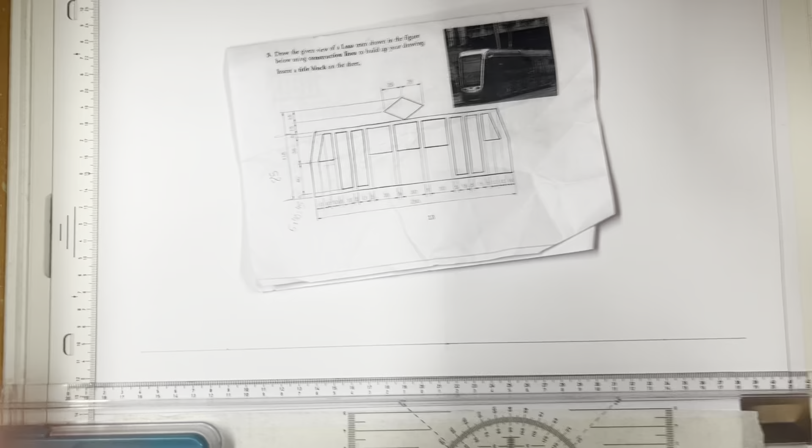Okay, so we're just going to do a quick video here going through the tram or Luas question.

Okay, I've drawn my title block border, so if I pull that back out, you can see my border goes all around. Title block is down the bottom there, with my T-square, you can see it. So, with my centre line drawn in, same as I've done for every other question.

Now I'm going to look at my drawing. It gives me an overall width of 250, an overall height of 115. So first thing I do, go 12.5 or 125 because it's half of 250. So mark to there, and then 0 in the center out to 125. That's our 2 marks there. So that's from that point there to this point here is 250 mil.

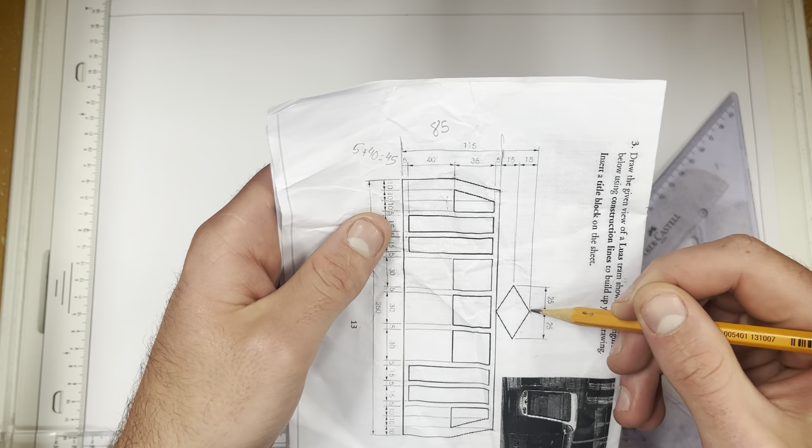Then it tells me that the overall height is 115. So from the bottom here to the top of here is 115. We don't want all of that for this section here. So we add it up, we go 5 plus 40 plus 35 and 5. 35 and 5 is 40, 40 and 40 is 80, plus 5 is 85. So from the bottom of the train car to the top of the train car is 85.

So I'm going to put the 2 of them in now. So I just send the line up. I'm going to mark 85 on it, and I'm going to mark 115. So make sure when you're marking 115, it's not 150, it's 115. So 10 is 100, 11 is 110, and then 5. And we're just going to draw 2 of them over really lightly.

Okay, and then come to your other point and extend it up, straight up. Okay, so then I need to mark in a few other little bits.

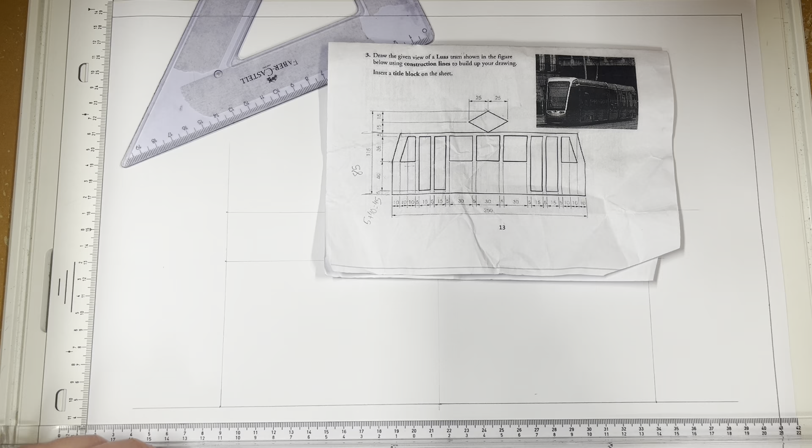So I need to figure out how I'm going to find this inclined line, or this line that's going at a bit of a slant. So it tells me that if I come in 10 mil and draw a line straight up, it brings me to that corner point there. So the first thing I do is mark in 10 mil.

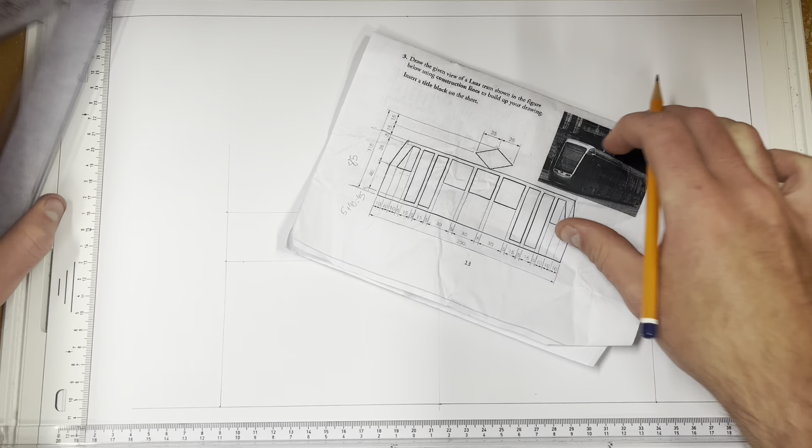Then it also tells me that if I come up 45, so if I bring this close here, so 5 plus 40, so 45 is this length here, where it goes to before it starts to slant in or turn into a bit of a slanted line. And then you can also see that lines up with the bottom of our windows here as well, and it goes the whole way across. So I'm measuring up 45 mil and drawing that line straight across, because it'll be the same on both sides and it'll be the same for windows going the whole way across.

Then all I need to do is join 2 lines like so.

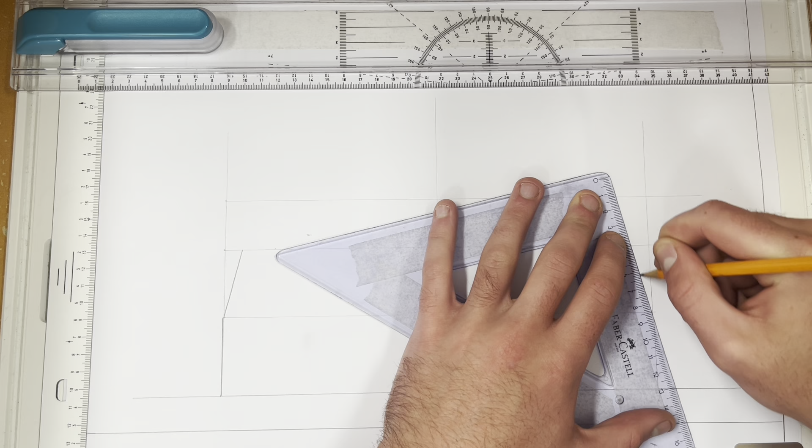So same thing on the far side. So measure in 10, put the mark, and connect the 2 of them down. Set square in, draw my line straight up. And then I can come in and heavy this top line in, and I'll do the bottom one as well.

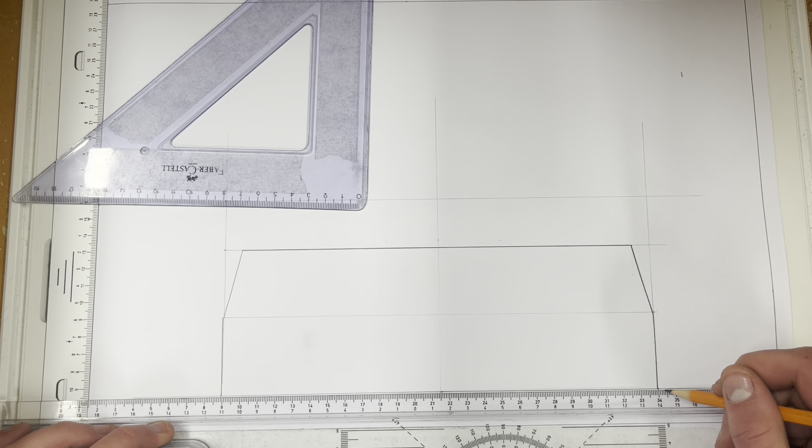So there's the outline of what we're looking for. Now we need to start filling in the windows. Okay, so I've the outline drawn in. Now I need to start adding in all my windows.

So you can see here, I need to come down 5 mil for the top of my windows and up 5 mil for the bottom of my doors. If I draw straight across from here, nice and light, and same from here. Same again, nice and light. And we know that the bottom of our windows hit that 45 mil line that we drew earlier.

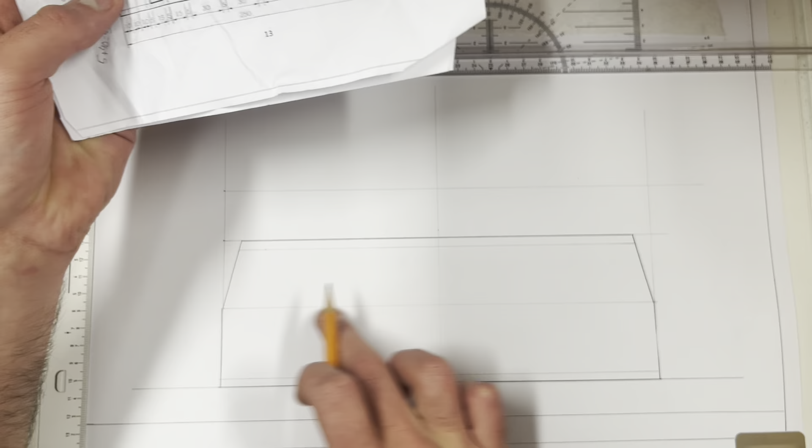And now all I need to do is actually draw in the widths of my windows. So in the drawing, it tells me to come across 10 mil, and then the window is 20 mil wide. So come across 10 mil.

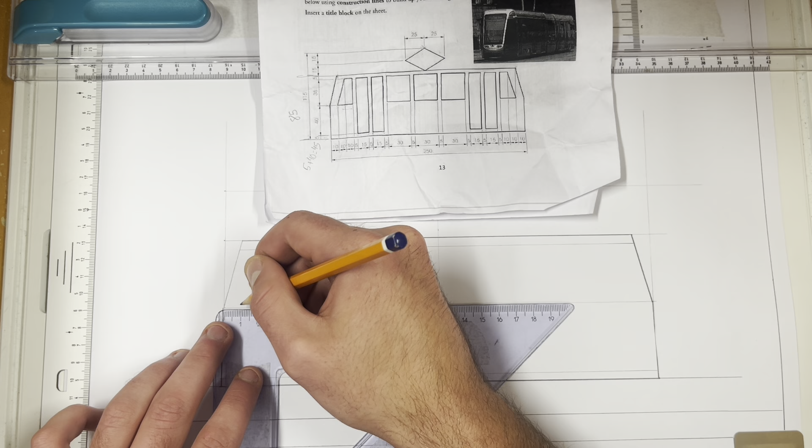So, 10, there's our 20, and there's our 30, because we're coming across 10 mil, so that's that line there. So that's going to be the bottom left corner of our window.

Then we have this second 20, which will go to the top, which will give us this little slope here before it comes down. And then there's the other part of our window. So draw my line straight up.

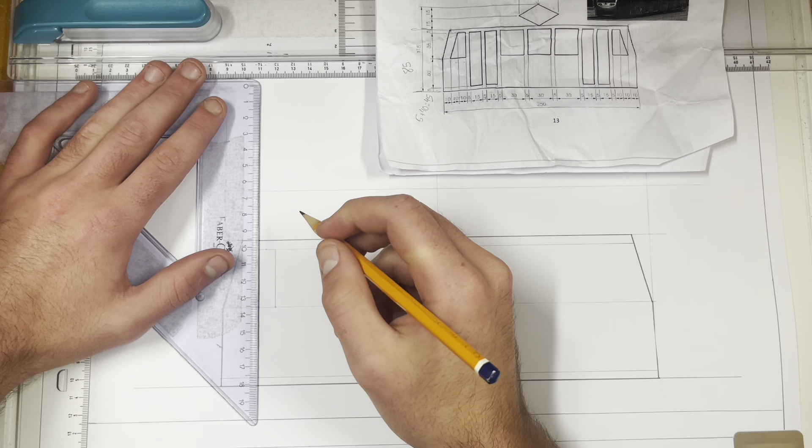Okay, I'm going to bring this up to here, so I'm just going to change that to a point up there. Join the two of them together. That joins the whole way back, and then I just connect it all up.

So now that I have that first window in, I'm just going to go through how we do the spacing for every window and door the whole way across, just to make sure that it all fits in on our page.

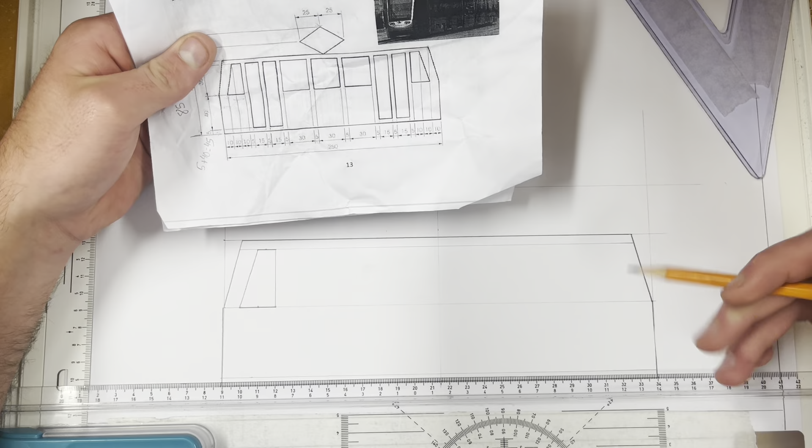So there's a 5mm gap between them, so 5mm, and then the door is 15mm. So we're doing a 5mm gap. I'll draw that in. Now remember, they're going from top to bottom there, so they're going from that top 5mm line to the bottom 5mm line. Then our door is 15mm.

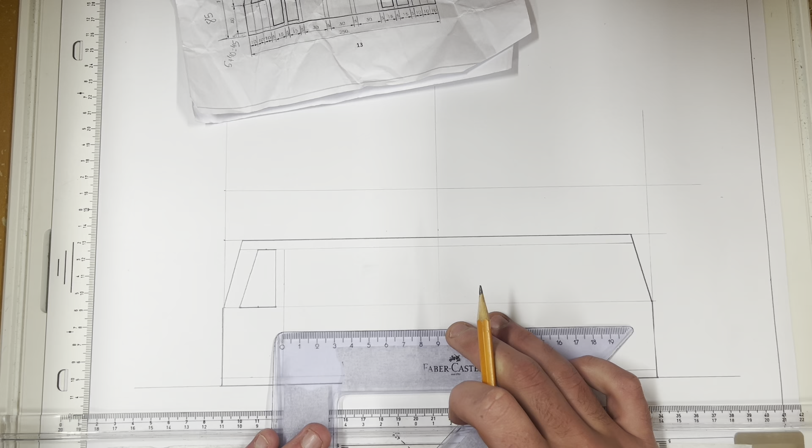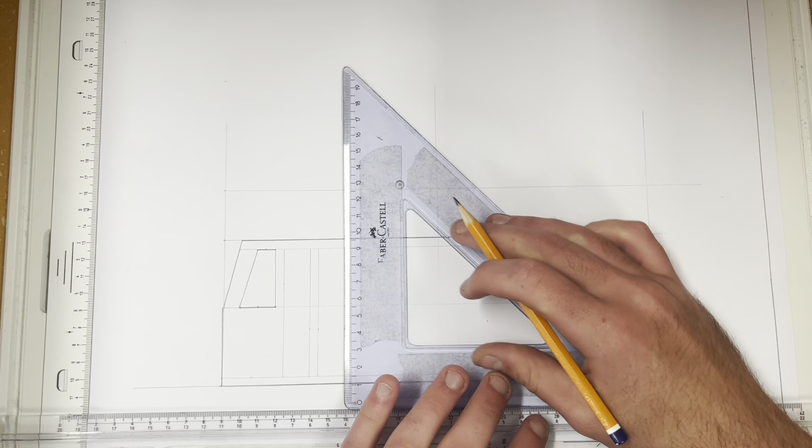There's that, and then there's a 5mm gap between that one. And then I'll just mark in our second door here as well while I'm here. So connect from there to there, connect this one to this one, and then here to here. So there's our two doors, 15mm wide, 5mm gap in between them.

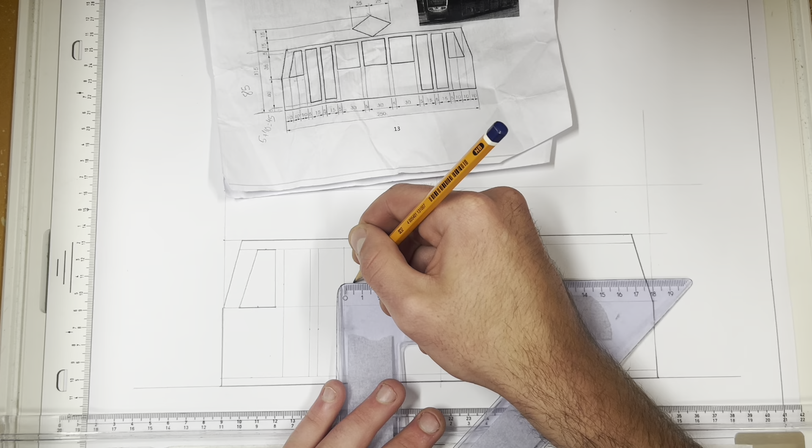Then we go to our next window, so there's a 5mm gap before it. And don't forget that these windows are only going to be in the top half, so make sure you just put your point up at the top half. So there's our 5mm. Draw in that first section of my window. There's that. Then the window is 30mm wide, so I come across 30mm, and I draw that down.

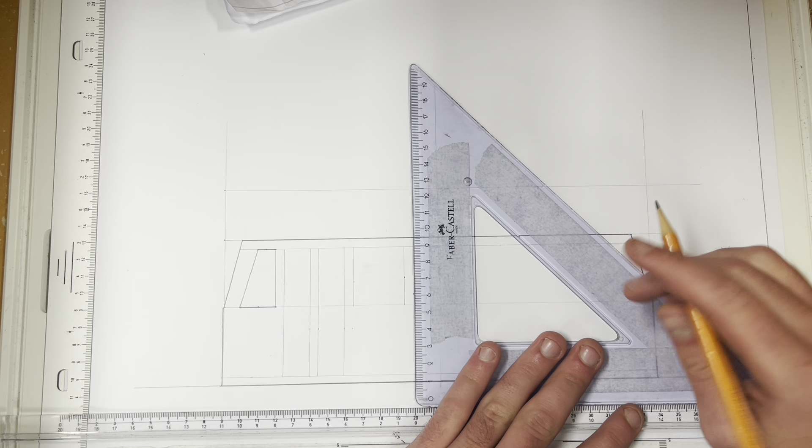Then I'll be coming across 5mm again, so there's our 5. Draw my line, and 30mm again, and you can see here that 15mm should line straight up with your center line because it's the center of our drawing. So there's 30, so if you look there, from 0 to there was 15mm, which lined up with our center line, and then 30. Draw that in.

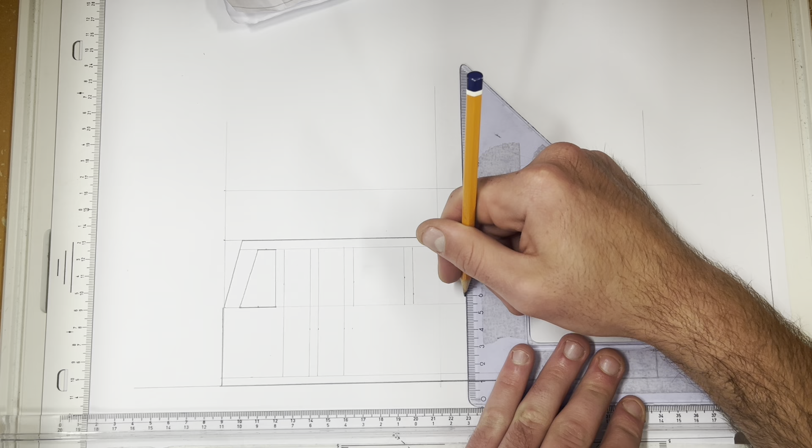And one last window, 5mm and 30. There, and there. Okay, so there's our two doors, 3 windows coming across.

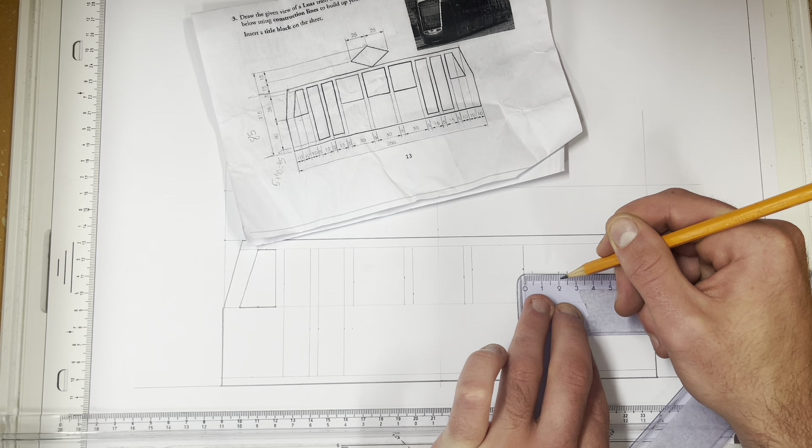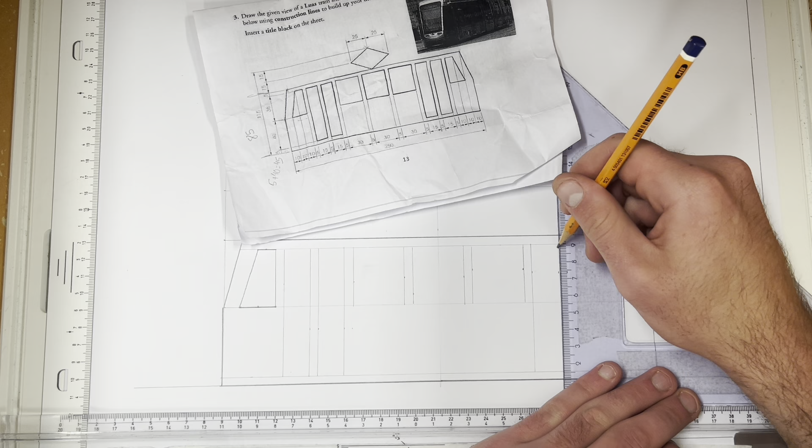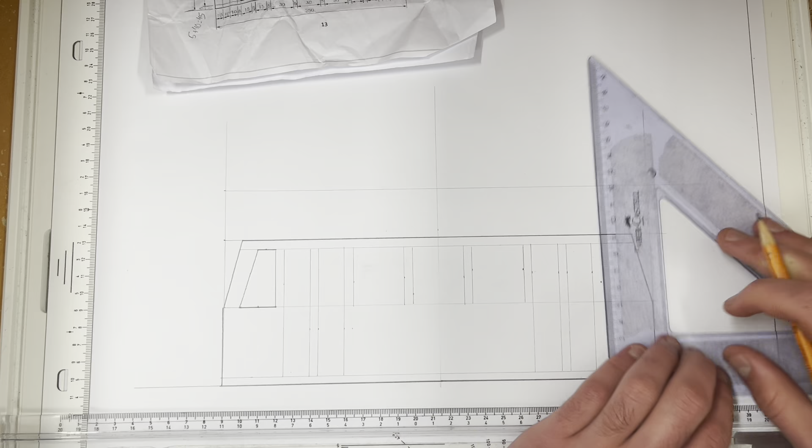Now all I need to do is finish in this last window, so over 5mm, and then our window was a 10 and a 20. So draw the first half of it here, or first little bit I should say. There's our first line of the window.

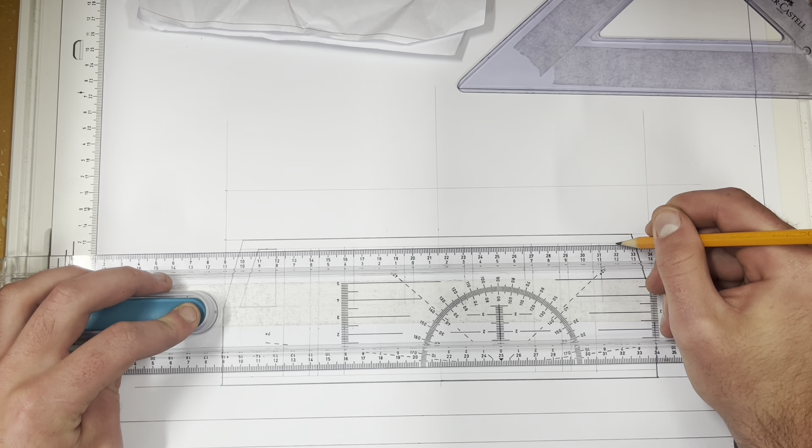Then I'm going to bring that 10mm mark that I've done up to the top, so I'm transferring it up to the top. That way I can connect that point there back to this point down here, and I'll do the same here, bringing that 20mm down to there. So from this line here to here is 20mm, or 10mm is in the middle there, and all we're doing is just filling this in and then connect them back.

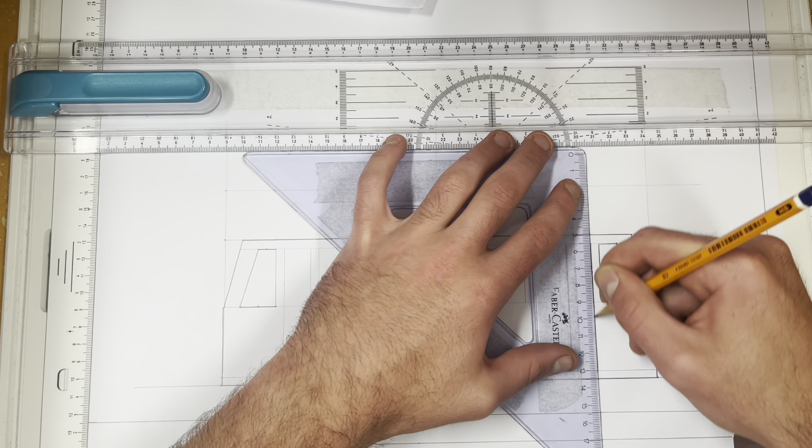Perfect. So now I'm just going to go back and heavy over all my windows and doors. I think they're heavy enough there, you can kind of see what is expected. A little bit here. Back down, give it a good squeeze. Okay, slightly better.

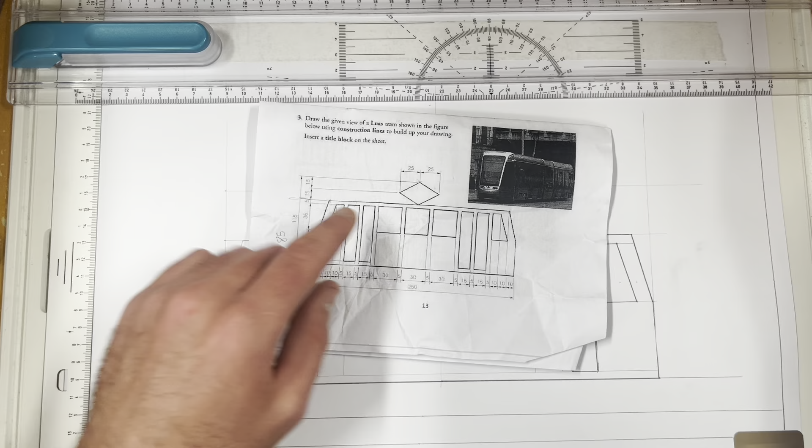Okay, now the last bit I need to do before I go heavy in the rest of it is just this little diamond or rhombus up at the top. So this is just our cables connected back up to the top. I've already drawn my center line, which is making this a lot easier. It tells me that it comes up at a height of 15 and 15, so it goes up at a height of 30. We've already drawn in the top of it, and we know that it has a width of 50, so from this point here to this point here is 50 mil.

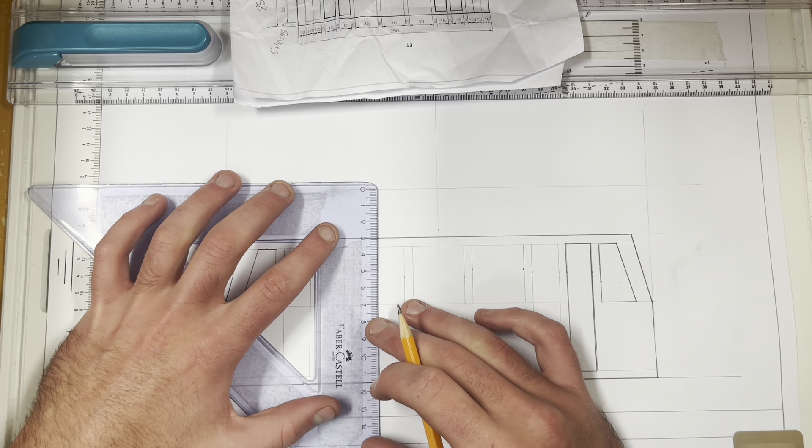So all I have to do is put 25 mil in the middle. Okay. Actually, before I do that, I'm just going to half this. So from that top point we drew earlier to the bottom of our train carriage is 30 mil. Half of 30 is 15, so there's our 15 mil mark there. Draw straight across.

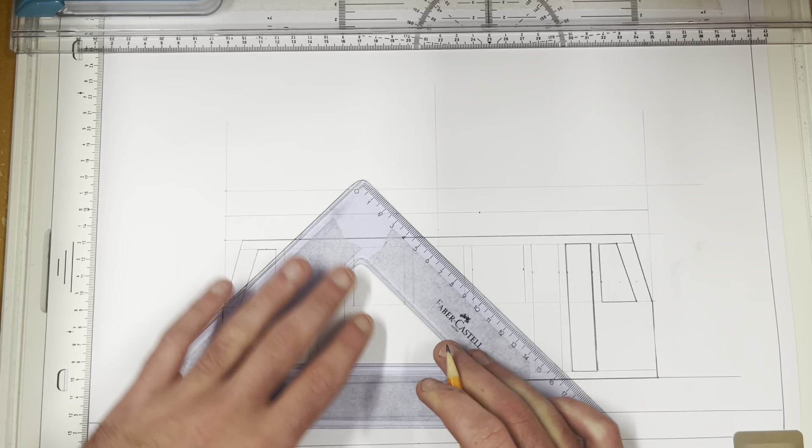Okay, there's that line. Now all I'm going to do is add in my 25 and then there. And then I'm just connecting up my points. So that goes to the top. This one goes out to the other side. And then they both meet back at this point here because it's where it connects to the train and our center line. So there's there. And there's there.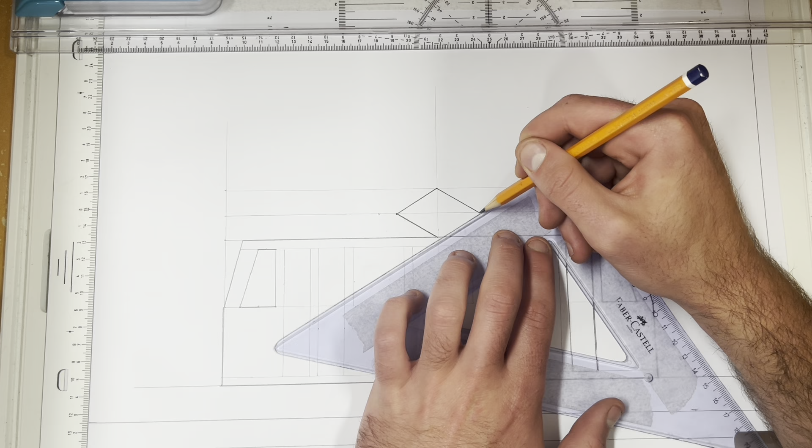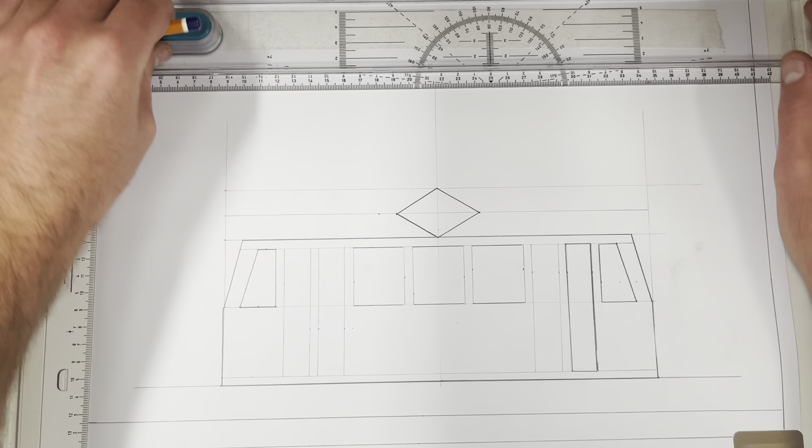Perfect. So now I'll just quickly fly through some of these. So there's the bottom window, bottom window, bottom window, top of the window, top of the window, and top of the window. So obviously you go through, finish out heavy and all that in. You don't need to go rubbing out any of these lines because on your page it should be that little bit lighter, but on mine I just have to keep it dark.